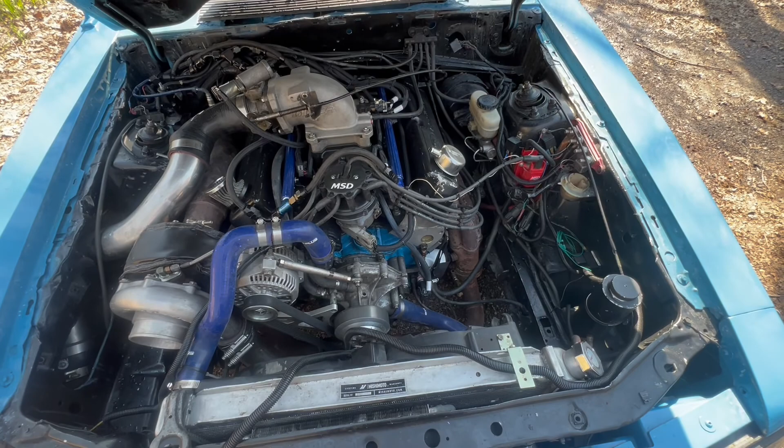So let's see what we can get into next. I don't know if this is going to work at all, but I'm going to try to clean the motor up down there and try to get that cap clean, and maybe that clean. I'm going to try to use the car wash that I was using. So let's see how this works.

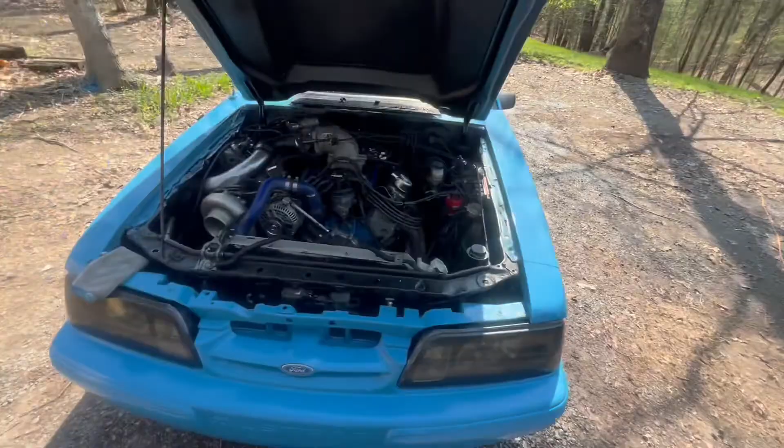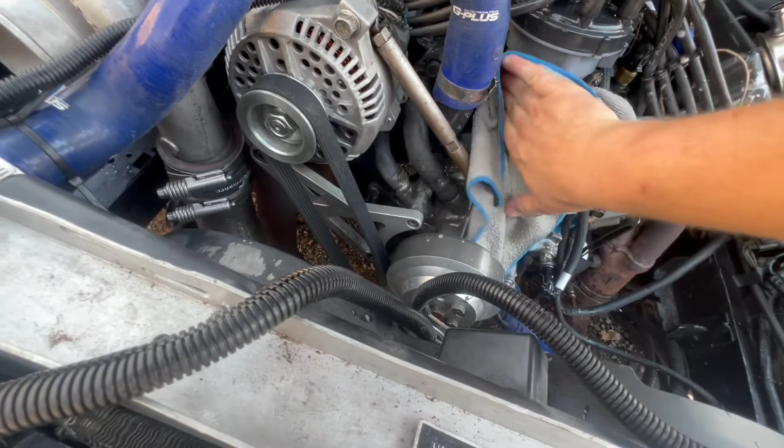Let's see if this actually does anything, guys. I mean, it's car cleaner, you would think that it would be designed to remove some grime and oil and grease to some extent, like road grime. Let's see, it seems to be doing something.

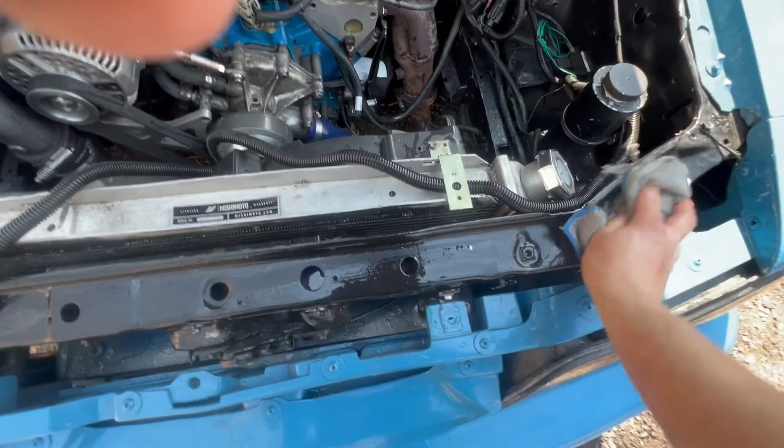This is probably one of the worst parts about a small block Ford, keeping that area right there clean. If anybody has any good suggestions for a different radiator hose setup that I can use so that I can get rid of that joint right there, please throw it down in the comments, because I hate that. I've gotten cut on that so many times, but I can't stand it. It looks ugly, it's just not what I want.

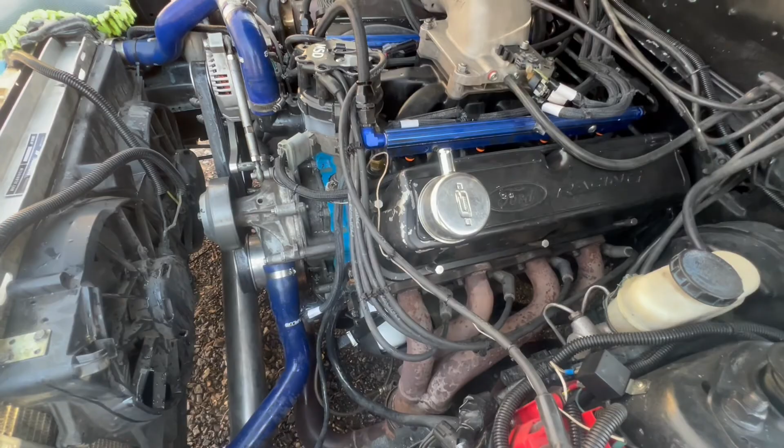Let's see if it cleans this up any. Not really. This aluminum's really porous, so it would probably work better with a scrub brush of sorts.

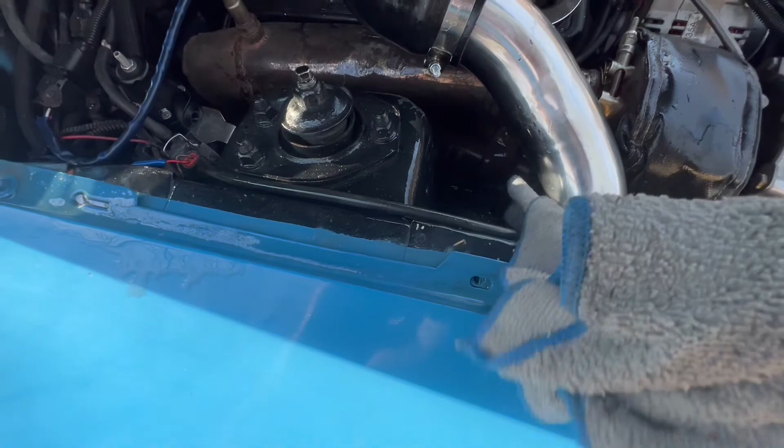So I'm not sure if I've ever showed anybody, but this is what I'm currently using for boost control, which is, of course, nothing. I'm just dumping the wastegate pressure. I plan on going to a CO2 setup.

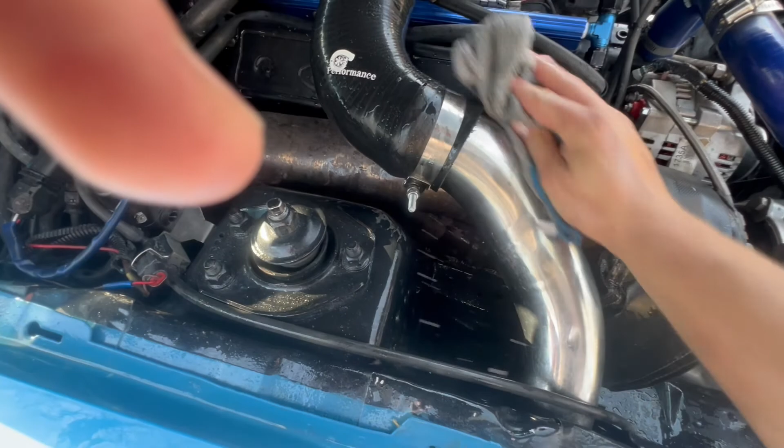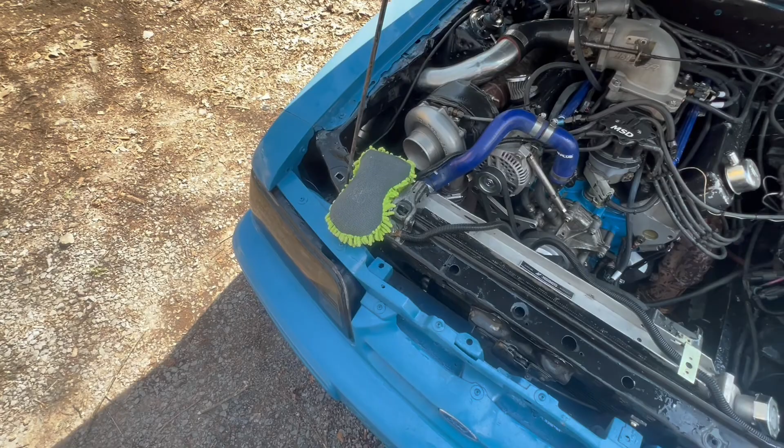That's the primary reason why I haven't put a flex fuel sensor on this car, because I do drive it on the street enough that I run into the issue of not being able to get E85. But I will show you guys on my software how I have it set up to switch back and forth. It's not a perfect system, and when I switch back and forth, whether from E85 to 93 or 93 to E85, I've got to run the car as low as I can in order to make the switch.

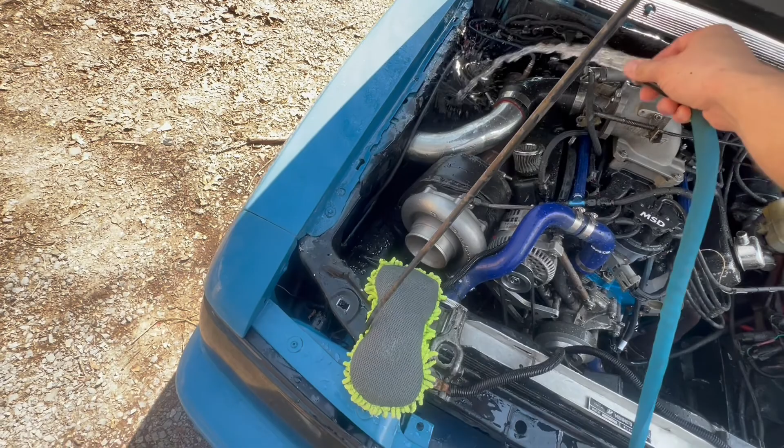That looks, I have to say, way better. It's not perfect. There's still a little bit of oil grime down in there, but it looks way better than it did. All right, let's crank this up.

All right, well, let's see what we get into next. I don't think anybody could get tired of hearing some good idle clips.

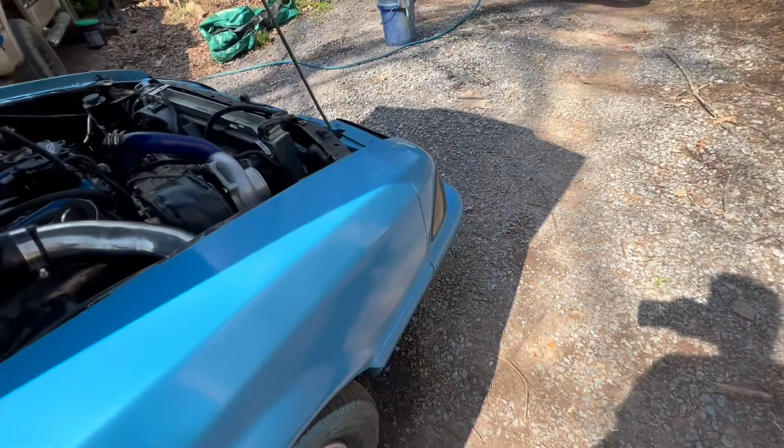Coming out because it's running on 93 instead of E85. It usually huffs out a little bit of alcohol when it's running on E85.

Got to love it. So this is what I want the whole car to look like. I don't know, you may be able to see some of the swirl marks in it, but look at that. Look at how pretty that is. See the metallic in it? And when I'm done with the car, the whole car should look like that. That's my goal.

We'll see, it's not perfect. Even this back's not perfect still. There's still some dents, some dings in it. You can see it right there, some imperfections in the paint. I know where I messed up, I won't do it again. I didn't give any of the paint enough time to dry, to be honest. And a lot of what you see in this is not just orange peel, but chemical pops, where the chemicals were coming out of the paint underneath and popping through.

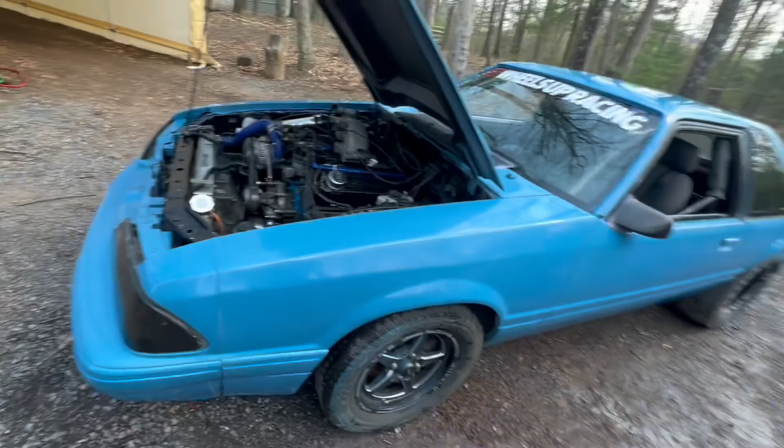Something else I got to do, guys, I got to get all this overspray off of here, get these things back looking good. I cleaned this side a little bit already. This is from me wet sanding. This stuff will come off really easy. You can see it's just coming off. If I rub it pretty good, it just comes off.

That's from me wet sanding, but this tire was the worst by far. Had the most overspray on it, and as you can see, there's still a little bit left on it. I need to pull the wheel off to get a lot of this stuff a little easier. But what I found really works the best is just a rag with acetone, and it wipes this stuff right off. And then I need to put rotors and stuff on this thing, so it's gonna get brakes and rotors.

And when I do that, my plan is to pull these off and polish the paint with the same rubbing compound that I'm gonna use to do the car, and get these things back shining again. So that's my plan with these. The acetone will take all the blue out of here, it worked really good, just wiping it, just took it right off. So I'm not too overly concerned about the tires, this stuff will just chip off over time. But yeah, that's my plan for cleaning the tires.

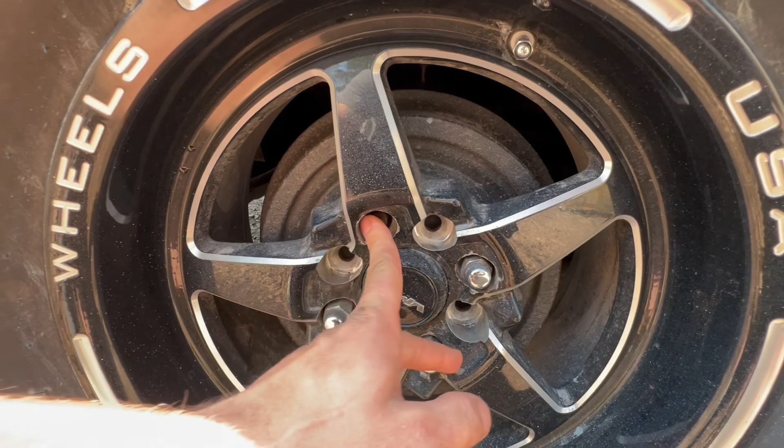And then it's a good thing I washed it, because back here I noticed a missing lug nut. So these are all tight, but for some reason that one wasn't, so gonna have to address that. On a good note, the inside of the car is still really clean, so pretty happy about that.

Yeah, inside of the car is still looking really good.

Alright guys, if I knew how to do a screen capture, I'd do one, but I told you I would show you how I've got my timing stuff set up. So this is my timing offset for 93. I wish it would focus... there it goes.

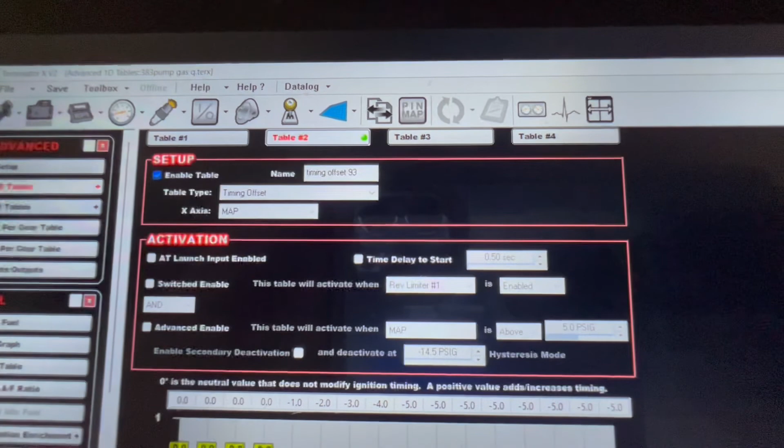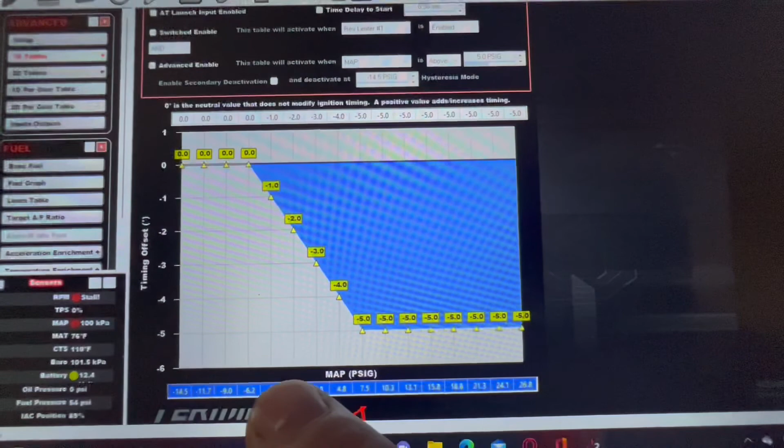That's my timing offset for 93. If I put 93 in the car and turn this on, as you can see it pulls 5 degrees out in total by 7 pounds, and then starts pulling timing at negative 6.2 pounds. So it just gradually pulls timing in. My car actually idles right in here, so it's pretty much always got timing pulled when this table's turned on.

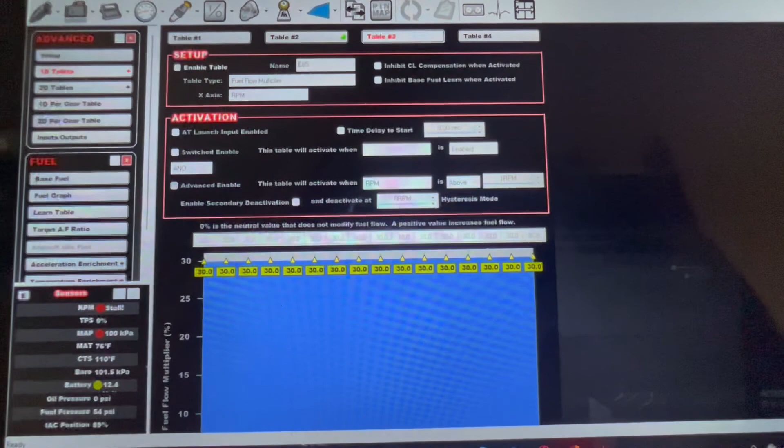And then when I put E85 in the car, all I do is disable this table and turn this table on, which is just my E85 fuel flow offset for my entire fuel, everything. And I don't have to use my tablet to do this, it's all in the handheld.

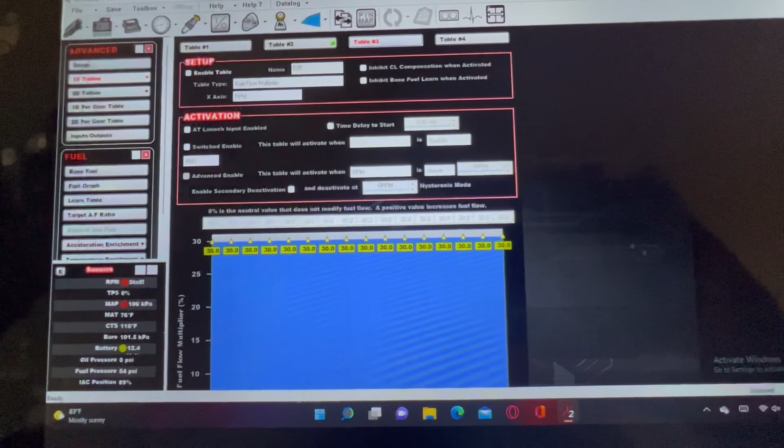So I can go into my advanced tables in the handheld. If I'm switching over to E85, I'll turn this table off and turn this table on, and that will give me all my timing back for the E85 and add the fuel in for it. Then when I go to 93, I turn this off, which takes the fuel back out, and turn this table on, which will pull the timing out.

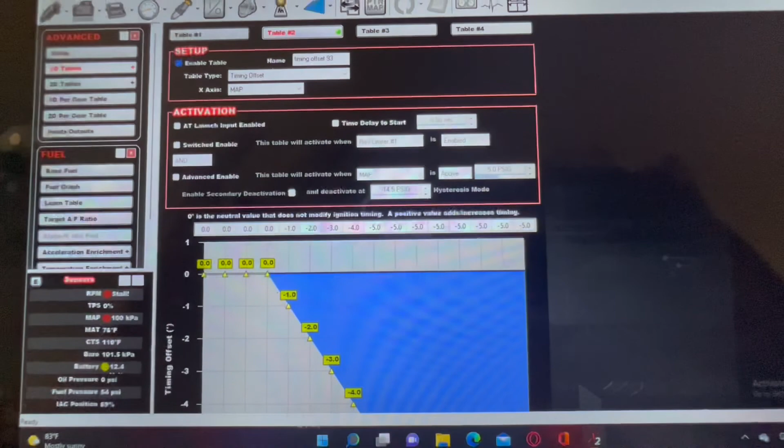It's real simple. The only issue with doing it like this is I don't have a sensor, which I have an advanced table set up for in my 2D tables for... ooh, I have one, so I had one. Maybe I don't have it in here anymore. Nope, I don't have it in here anymore.

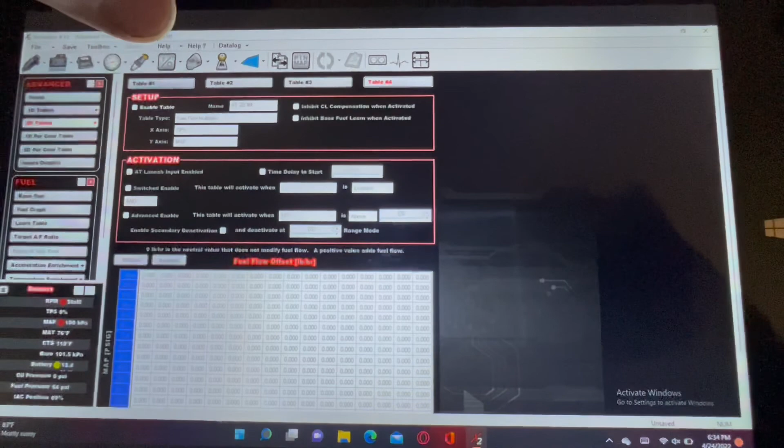Well, I used to have a 2D table set up for when I do put a flex fuel sensor on the car. Maybe it was on my 1Ds. Nope.

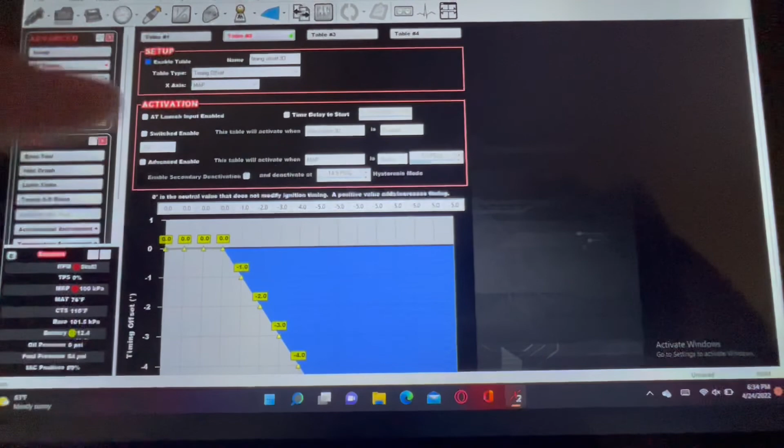So when I do put a flex fuel sensor in the car at some point, I'll be able to use it. But right now I don't have one, so this is just kind of a dirty way of doing it. It's not perfect, because when I switch from E85 to 93 or 93 to E85, the tank has to be pretty much bone dry, which isn't too big of a problem because I drive it around town on 93 the majority of the time.

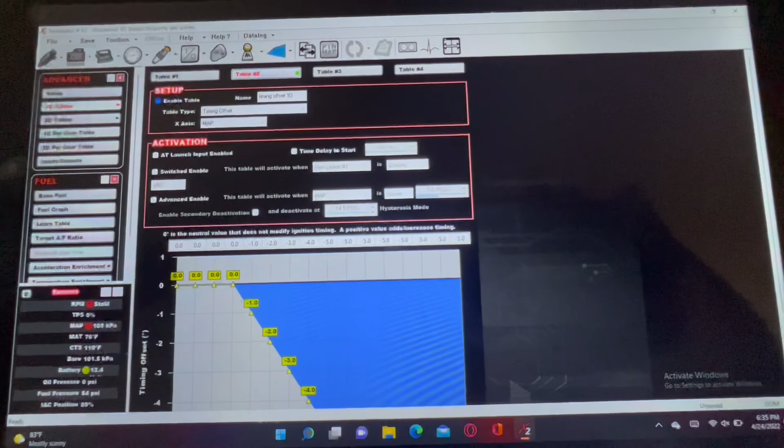And then when I want to go to the track, it's nothing to just grab a couple of gas cans, pump all the fuel out of the tank into them, and then stop at a gas station and fill it up with E85. So it's not a huge deal, but that's how I do it.

I know I've said in the videos a couple of times that I had some tables set up, but I figured I would show this to kind of show how I was doing it. And then, yeah, that's it.

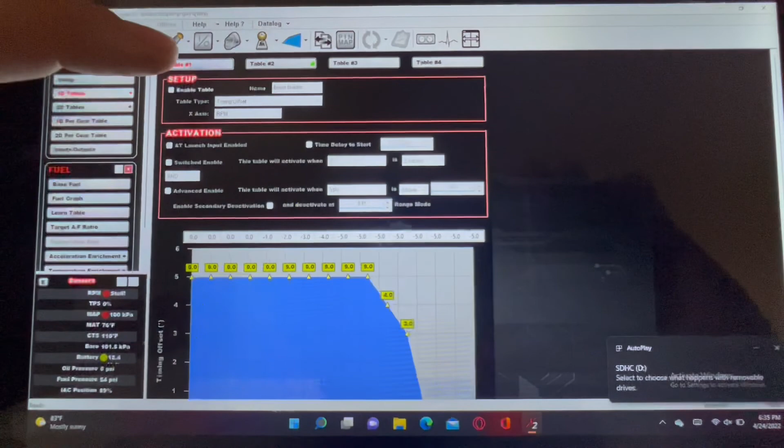And then I also have this table that I turn on every once in a blue moon. This is just a boost builder table. It just throws 5 degrees of timing in it to try to get the boost to come up faster, and then pulls it out as it comes up in RPM.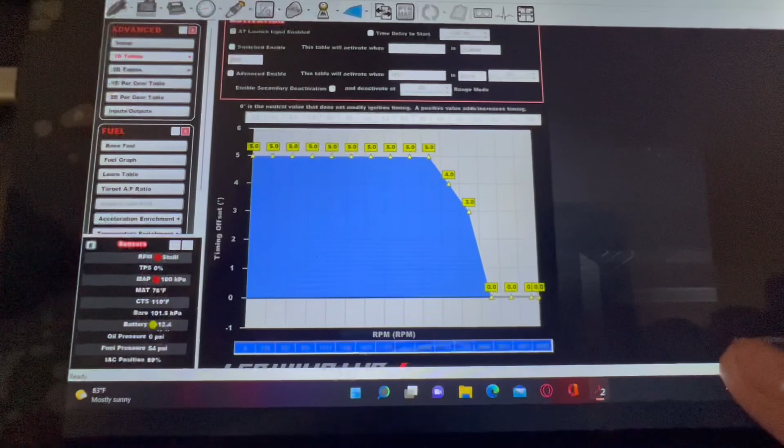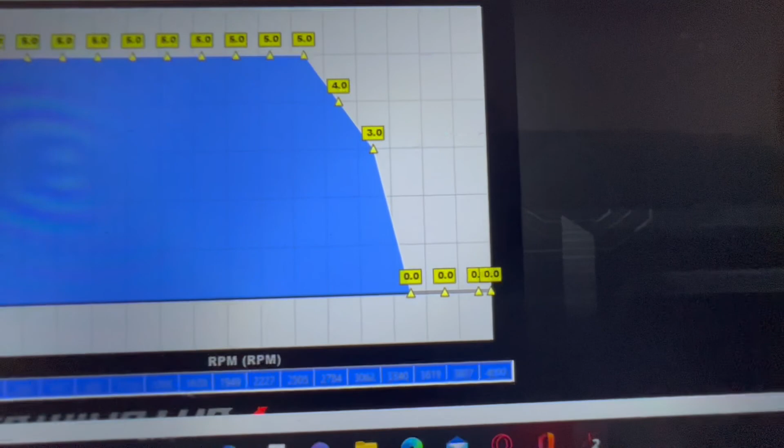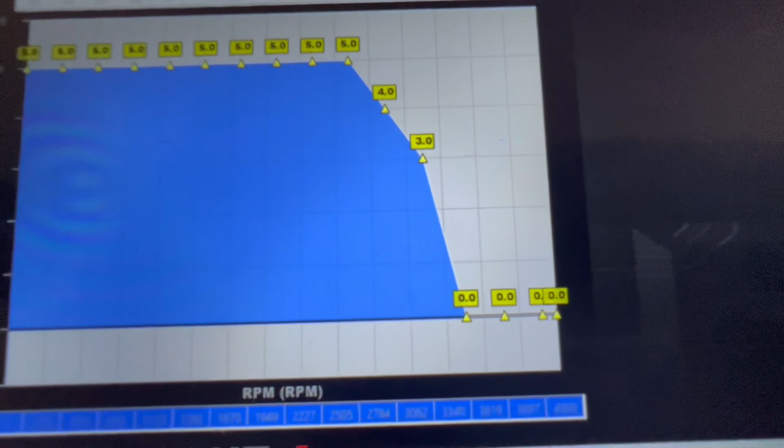So I can set my 2-step. I haven't used this since I put the new torque converter in it, but my old torque converter was set for 4,000. So it just kind of threw timing in, and then as it got closer and closer to the 2-step, it dropped the timing back down, and that made the car come up on boost a whole lot faster on the trans brake. But I haven't needed this table since I put this other one in.

This other one comes up on the 2-step pretty quick.